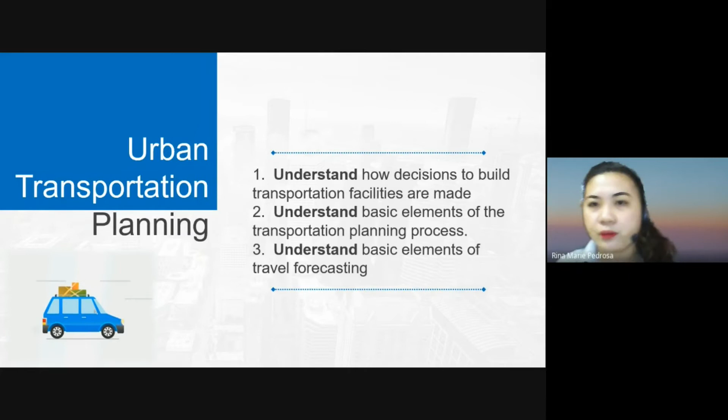So there are common types of urban land uses. To tackle this, I'll just give it a review: residential, commercial, industrial, institutional, recreational, and agricultural. This can be found based on your CLUP, your Comprehensive Land Use Plan. This varies depending on the municipality or city here in the Philippines, but it's also the same in other countries.

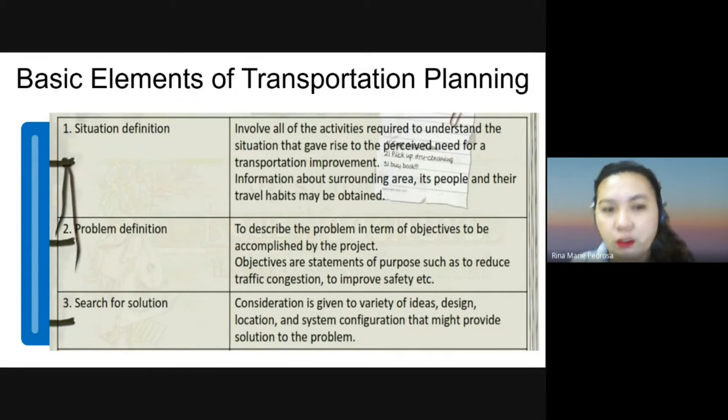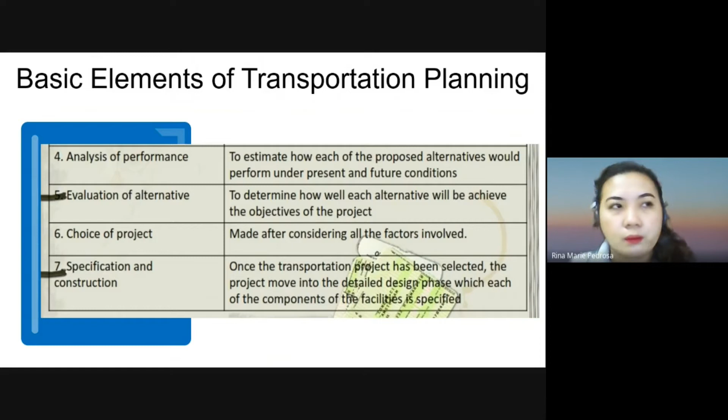So going back to our basic elements of transportation planning, again: situation definition, problem definition, search for solution, analysis of performance, evaluation of alternative, choice of project, specification, and construction. I know we have tackled this before and I've given you a few examples, but I'll give you another one for the sake of urban planning - planning the relocation of a rural road, simple yet good enough to explain the steps.

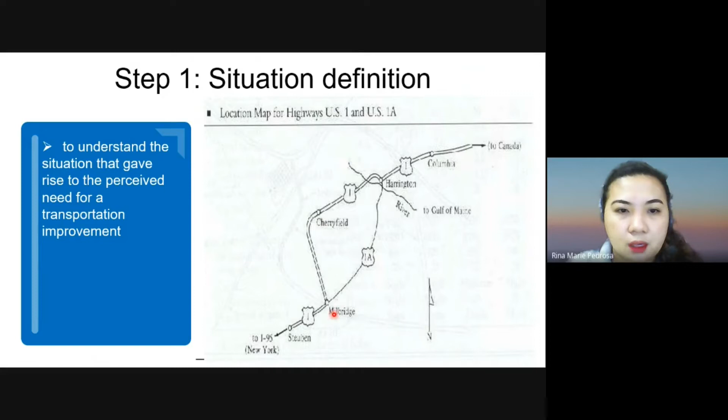Step one, situation definition - to understand the situation that gave rise to the perceived need for the transportation improvement. So this one, they are highlighting this - it's the urban area.

Step two, problem definition. The purpose of this step is to describe the problem in terms of the objectives to be accomplished and translate those objectives into criteria. What are those objectives? Statements of purpose: reduce traffic congestion, improve safety, maximize net highway and user benefits. What is criteria? These are the measures of effectiveness - you consider the travel time, accident rate, the delays.

Fourth step would be the analysis of the performance. So those are our options - now we analyze our options. This is to estimate how each of the proposed alternatives would perform under present and future conditions.

So here is a table they considered - they have the speed, the distance, the travel time, the accident factor, construction cost. Very important: residences displaced, city traffic, present, future returns in 20 years, air quality, noise, tax loss, trees to be removed - that's also one consideration, and of course the runoff.

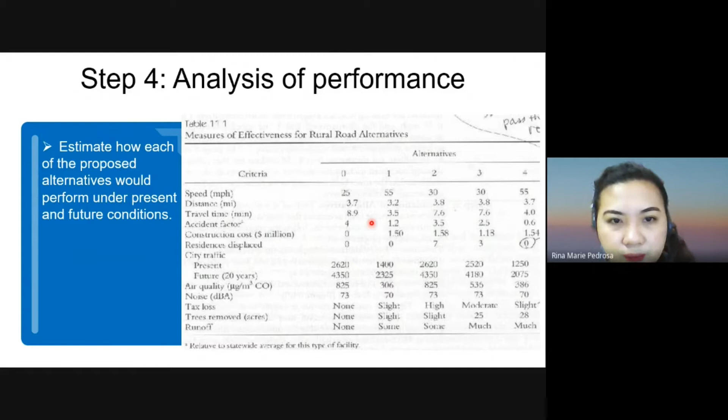Travel time, shorter. The alternatives 2 and 3 are the longest. Accident factor: 1.2, 3.5, 2.5, this one 4 - a higher accident factor. The construction cost, I have 0 for this one. This one's 1.5, 1.58, 1.18, and 1.54. So there are a lot of options here.

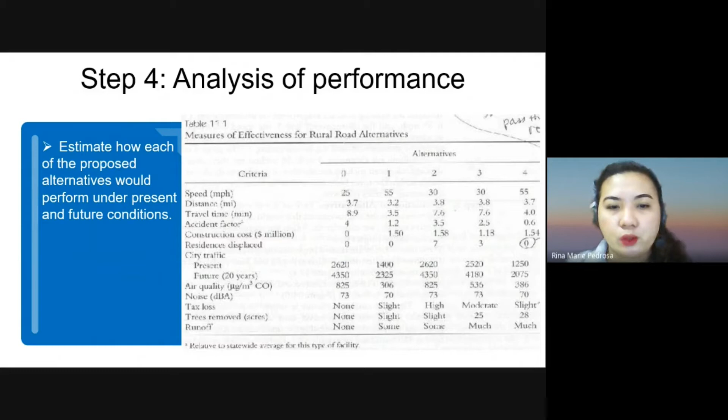We have the evaluation again of our alternatives - the travel time between West Harrington and US 1 versus cost, the cost and the travel time. So options 1, 4, 2, 3. Here, 2, expensive.

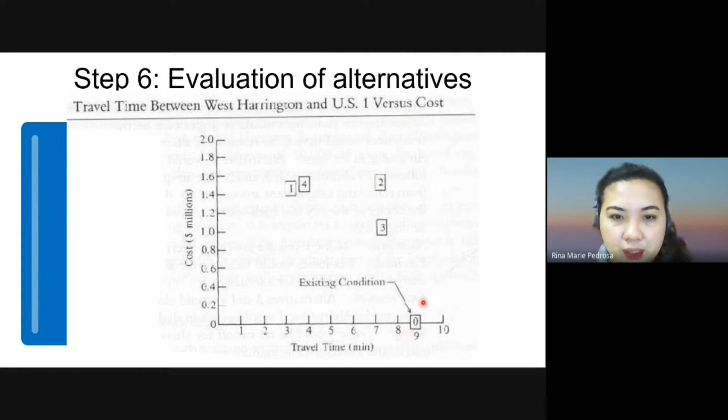Existing condition would be your 0. So you only have 4 options. This one in terms of travel time and the cost. So 2, high risk. 3 is below.

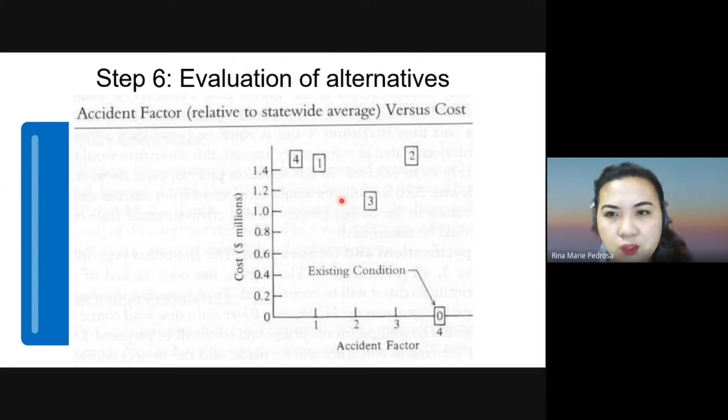So the next step would be the choice of the project. Based on the alternative evaluation in step 6, we will choose the best alternative for design and eventually construction. The best choice may not be built because of oppositions by the people of the community that is affected. So if you observe, most of the checking that we had, alternative number 3 is the best option. But there are 3 residents to be displaced.

The last step would be the specification and construction. Once the project has been chosen, a detailed design phase is begun in which each of the components of the facility is specified. Though there are 3 residents to be displaced and other things needed to be considered, that can actually be of help during the planning, creating the pre-planning stage, before we proceed to the construction.

Same here in the Philippines, we do that. We have a certain section in the planning division that caters to right of way issues, those people who are going to be affected, their lot. And we also have what we call the issuance of ECC under the EMB of the DENR. Before we construct certain infrastructure, we have to secure that certificate to make sure that the environment is not compromised or it will not be affected or deteriorated because of that project. So that's it, that's one consideration.

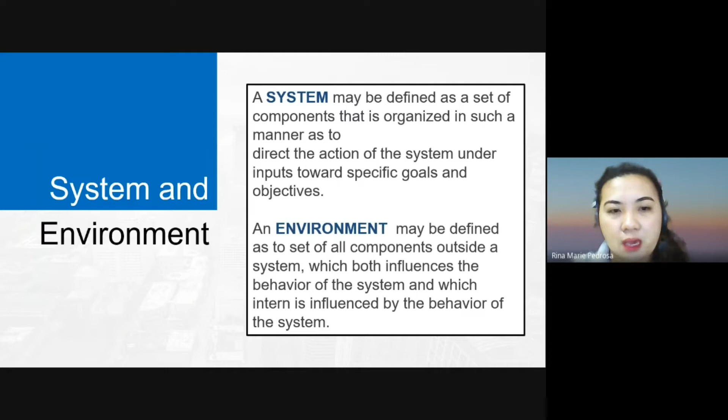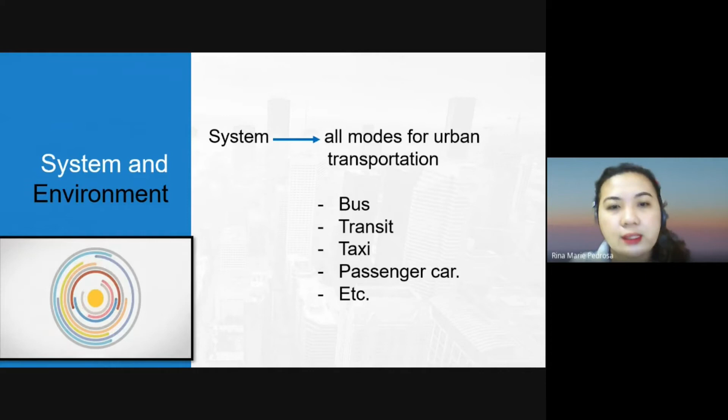So here is your system - all modes of urban transportation. We have the bus, transit, taxi, passenger car, etc. So we can classify them as follows: urban passenger transportation system, urban public transportation system, urban goods transport system, urban intermediate public transport system, urban personal transport system.

So the urban transportation system may be thought of as responding to social and economic forces that exist in urban areas. This urban socio-economic environment is in turn influenced by the characteristics of the transport system. So here are those classifications: passenger transportation system, public transportation system, goods transportation system, intermediate public transport system, and personal transport system.

So who does all these things? A system planner. So what is the role of the system planner? They are the ones who conceive in general ways the direction of their efforts to design a system that achieves maximum integration or degree of fit between the system and its environment.

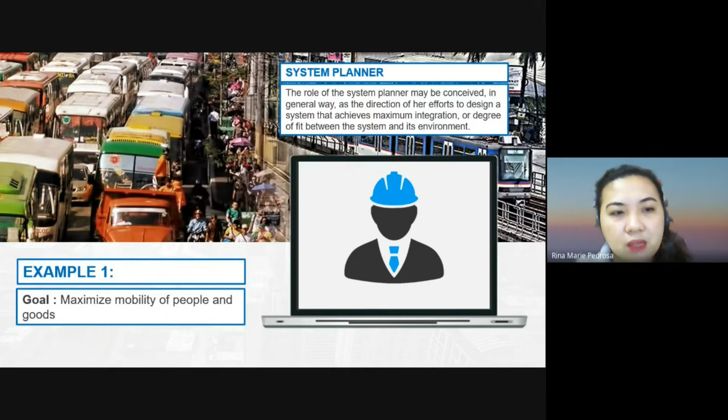Let's have an example for that. Example: maximize mobility of people and goods. So what are the objectives? We have to minimize travel time. The second one, minimize travel cost. Third, provide adequate frequency of service. Fourth, provide adequate system capacity, provide adequate system safety, and lastly, provide adequate system reliability.

So what will be our standards? We already have our objectives, criteria. Now how are we going to maximize mobility of people and goods? First one, to minimize travel time. Then the travel time by public transport between major activity centers should not exceed 30 minutes.

The second goal is to minimize travel cost. The travel time cost by public transport should not exceed 15% of the travel cost of private transport.

Third, provide adequate frequency of service. The frequency of public transport service on any route should be not less than 3 per hour.

Fourth, provide adequate system capacity. The peak hour occupancy of public transport vehicles should not exceed the permissible limits.

Fifth, provide adequate system safety. Fatal accidents involving public transport vehicles should be less than 1% of the total.

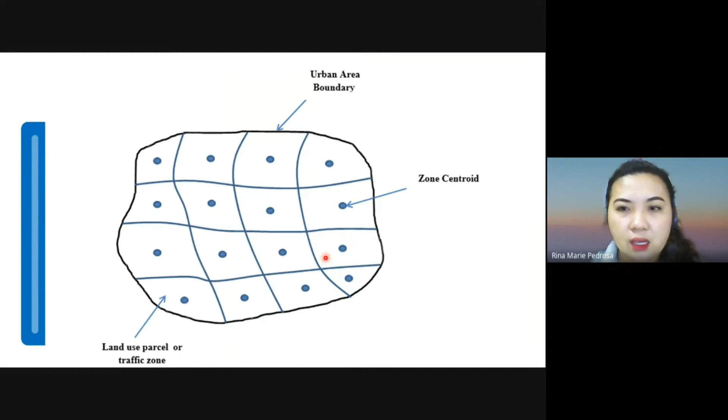Here you can observe this is the zone centroid, the center of the zone. This is your zone, this is the urban area boundary, and this is the land use parcel or traffic zone. That's how you create it.

Let's go to the transportation survey. The first stage in the formulation of a transportation plan is to collect data on all factors likely to influence your travel pattern.

The work involves a number of surveys: number 1, an inventory of existing travel pattern; number 2, an inventory of existing transport facilities; number 3, an inventory of existing land use and economic activities.

If you recall, we had the options 0, 1, 2, 3, and 4. Option 0 was actually the existing condition.

The study area for which transportation facilities are being planned is first of all defined. Transportation planning can be at the national level, the regional level, or at the urban area level. For planning at the urban level, the study area should embrace the whole conurbation containing the existing and potential continuously built-up areas of the city.

The imaginary line representing the boundary of the study area is termed the external cordon line. The area inside the external cordon line determines the travel pattern to a large extent, and as such it is surveyed in great detail. The land use pattern and economic activities are studied intensively, and detailed surveys such as the home interview survey are conducted in this area to determine travel characteristics. On the other hand, the area outside the cordon line is not studied in such detail.

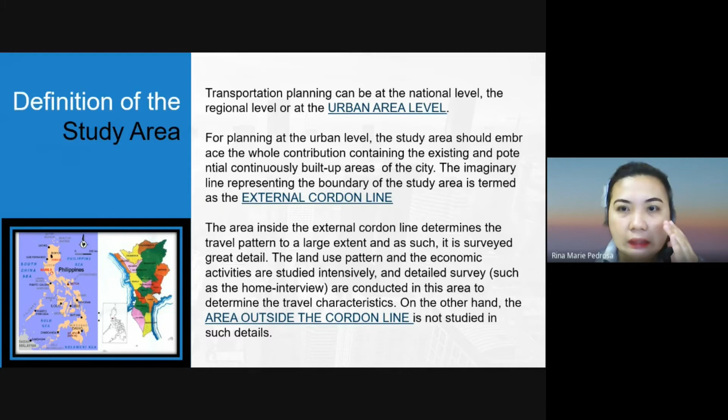So how do you select the cordon line, I mean the external cordon line? The selection of the external cordon line for urban transportation planning should be done carefully, with due consideration of several factors.

Number 1, the external cordon line should circumscribe all areas which are already built up and those areas which are considered likely to be developed during the planning period.

The external cordon line should contain all areas of systematic daily life of the people oriented towards the city center, and should in effect be the commuter shed.

The third factor: the external cordon line should be continuous and uniform in its course so that movements cross it only once.

The line should intersect roads where it is safe and convenient for carrying out traffic surveys.

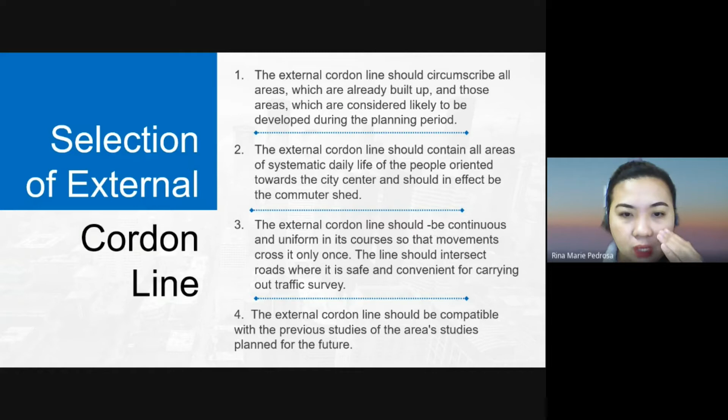Let's go to zoning. The defined study area is subdivided into smaller areas called zones or traffic zones. The purpose of such subdivision is to facilitate the spatial quantification of land use and economic factors which influence travel pattern. Subdivision into zones further helps in geographically associating the origins and destinations of travel.

Zones within the study area are called internal zones, and those outside the study area are called external zones. In large study projects, it is convenient to divide the study area into sectors, which are subdivided into zones.

Zones can themselves be subdivided into subzones, depending upon the type of land use. A convenient system of coding of zones will be useful for the study. One such system divides the study area into 9 sectors.

So the example that I'm going to be presenting: the central sector, or the CBD. What does CBD mean? A central business district - this is the commercial center of an urban area. Usually, CBD is designated as 0, and the remaining 8 sectors are designated from 1 to 8 in a clockwise manner. The prefix 9 is reserved for the external zones. Each sector is subdivided into 10 zones bearing numbers from 0 to 9. So that's how you do it.

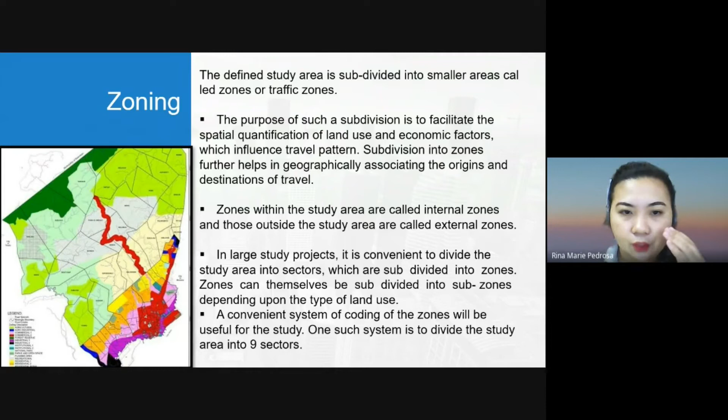So here is an example, actually based in the US: the Charlotte Area Transportation Study, thoroughfare system, and zone boundary. So they have one, two, three - so this is their zones, traffic zones.

It would be helpful if the following points are kept in view when dividing the area into zones. The zones should have a homogeneous land use so as to reflect accurately the associated trip making behavior. You will understand this further when we go to our traffic demand models - if you remember, trip distribution, trip generation, modal split, and route assignment. You'll be discussing that in the next topic.

Number two, anticipated change in land use should be considered when subdividing the study area into zones. Three, it would be advantageous if the subdivision follows closely that adopted by other bodies, for example the census department, for data collection - this will facilitate correlation of the data. So census, we already have that.

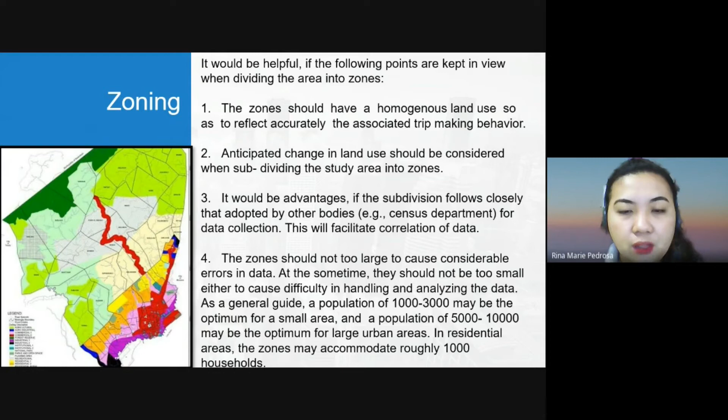Number four, the zones should not be too large to cause considerable errors in data. At the same time, they should not be too small either, to cause difficulty in handling and analyzing the data. As a general guide, a population of 1,000 to 3,000 may be the optimum for a small area, and a population of 5,000 to 10,000 may be the optimum for large urban areas. In residential areas, the zones may accommodate roughly 1,000 households.

Number five, the zones should preferably have a regular geometric form for easily determining the centroid, which represents the origin and destination of travel for your OD study. Number six, the sectors should represent the catchment of trips generated on a primary route. Number seven, zones should be compatible with screen lines and cordon lines.

Zone boundaries should preferably be watersheds of trip making. Number nine, natural or physical barriers such as canals, rivers, or any type of water bodies can form convenient zone boundaries. And lastly, number 10, in addition to the external cordon lines, there may be a number of internal cordon lines arranged as concentric rings to check the accuracy of survey data.

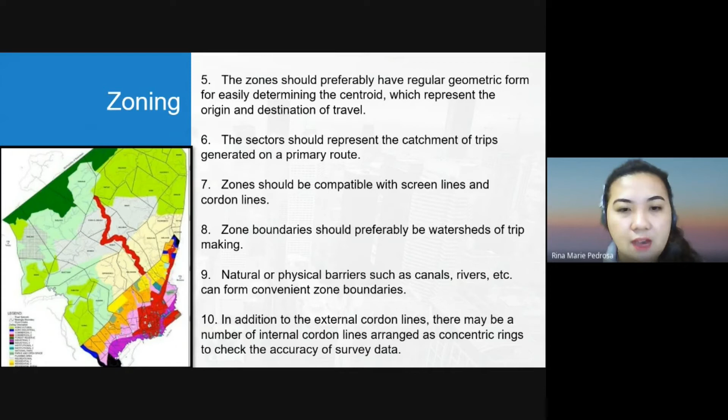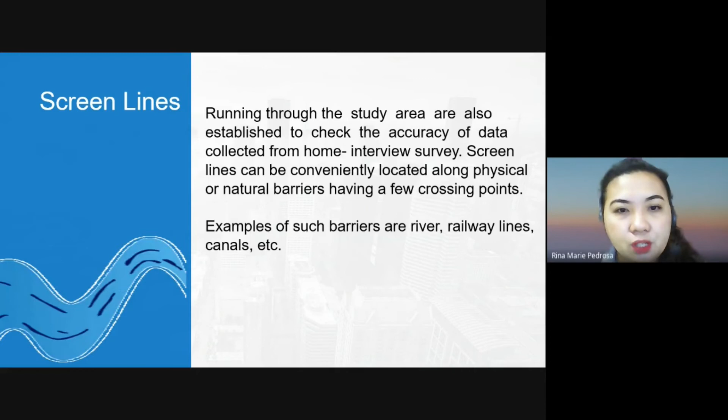So what is a screen line? We already discussed the cordon lines - now let's proceed to the screen lines. Lines running through the study area are also established to check the accuracy of data collected from home interview surveys. Screen lines can be conveniently located along physical or natural barriers having a few crossing points, and examples of such barriers are rivers, railway lines, canals, etc.

So these are the types of movements. For large urban areas, the internal-to-internal travel is heavy, whereas for small areas having a population less than 5,000, the internal-to-internal travel is relatively less. Most details of internal-to-internal travel can be obtained by home interview survey. So what are these external, internal, internal-to-internal movements? These are the basic movements for which survey data are required.

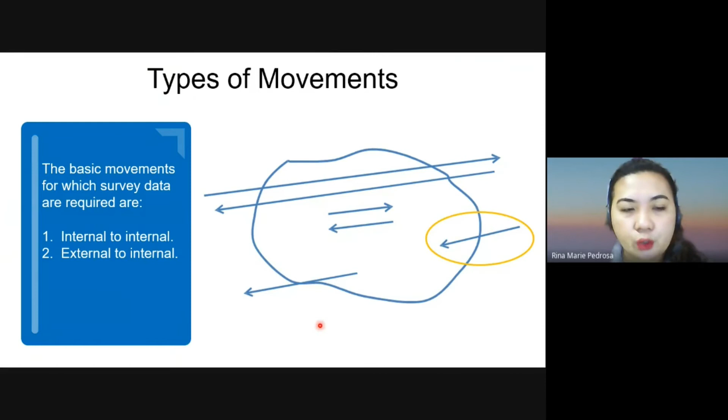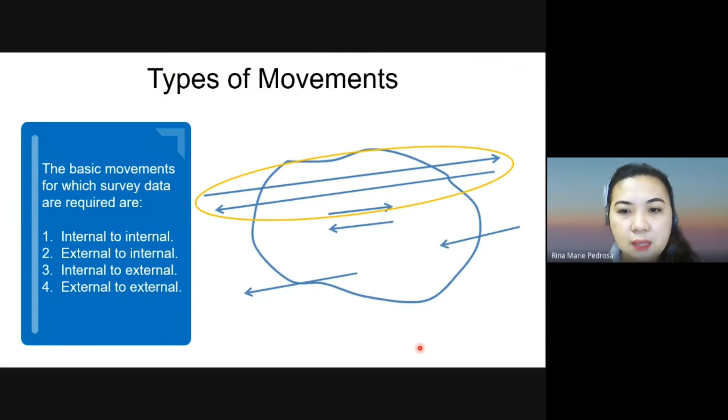Let's have the internal-to-internal: when you see this arrow, this is the origin, this is the destination - so this is internal, within your zone or boundary. The second one is external-to-internal: from external to internal, going inside your zone. The third one is internal-to-external: from inside your zone going outside. And we also have external-to-external, where they're just passing by - these are the long ones. The details of internal-external, external-internal, and external-external travels can be studied by cordon surveys.

So let's go to data collection. When collected at home, the data can be wide-ranging and cover all the trips made during a given period. The data collected during the trip is necessarily of limited scope, since the procedure yields data only on the particular trip intercepted. So that is the data collected at home.

There's also the data collected during the trip end and also data at the destination of the trip. So at the destination end, direct interview types of surveys provide data on demand for parking facilities and the trip ends at major traffic attraction centers such as factories, offices, and commercial establishments.

The following are the surveys that are usually carried out: home interview survey, commercial vehicle survey, intermediate public transport surveys, public transport surveys, roadside interview surveys, postcard questionnaire surveys, registration number surveys, and lastly, tag-on vehicle surveys.

The information to be collected from the home interview survey can be broadly classified into two groups: household information, and number two, the journey or trip data. So this one is mostly about socioeconomic profiling.

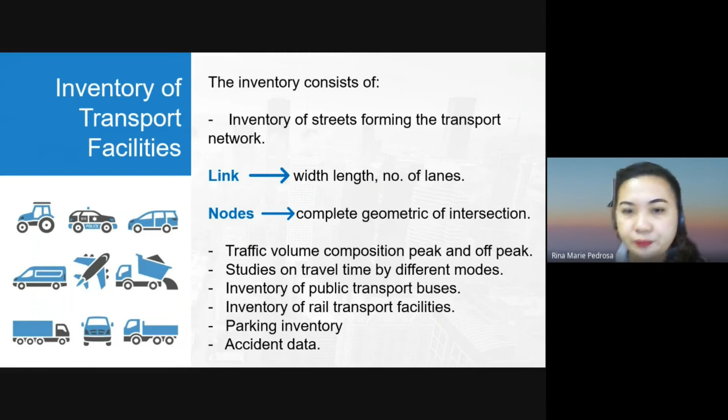Aside from the transport facilities, you should also have the inventory of land use and economic activities. Number one, the inventory of land use. Since travel characteristics are closely related to the land use pattern, it is of utmost importance that an accurate inventory of land use be prepared. So data on intensity of usage of land for different purposes, such as residential, industrial, commercial, recreational, open space, etc., in each of the traffic zones, are to be located from concerned departments or organizations.

Meanwhile, number two, the inventory of economic activities. Aggregate data on demographic and socioeconomic activities should be collected from other sources, to include the following: first, the population of the planning area in various zones, age, sex, and composition of the family, employment statistics, housing statistics, income, vehicle ownership.

Next topic would be our transport related land use model, so the land use transport interaction.

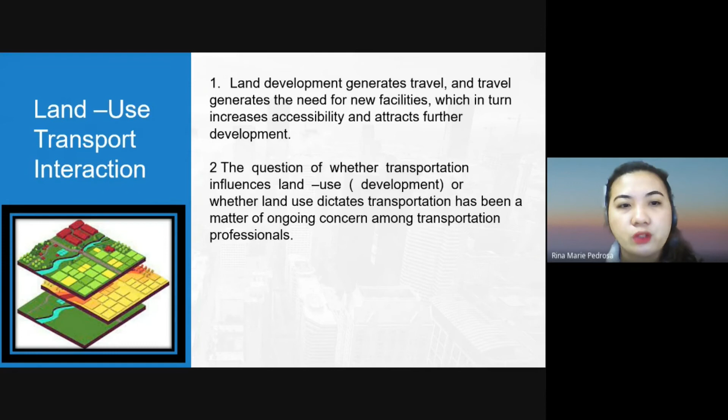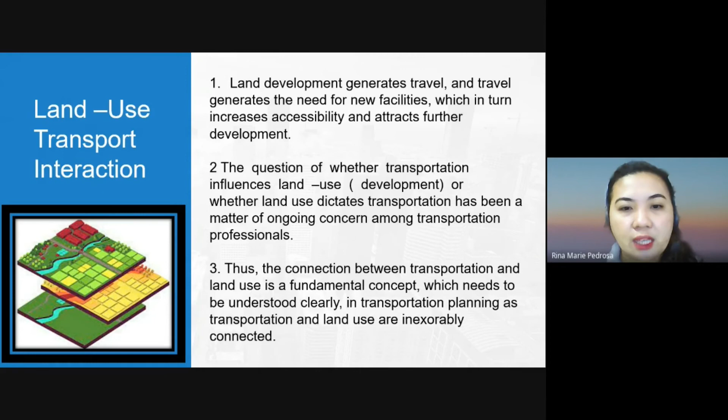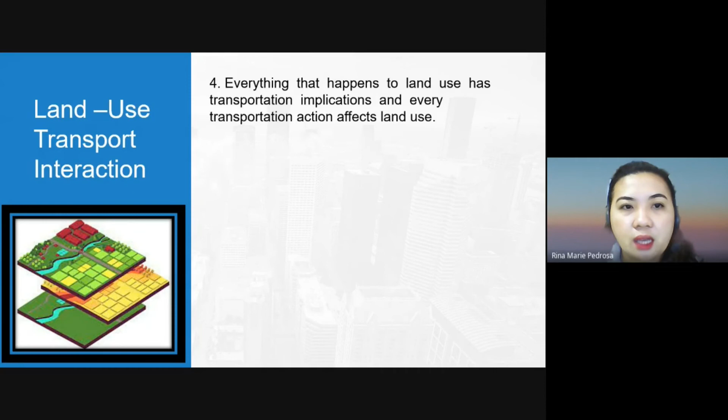First, land development generates travel, and travel generates the need for new facilities, which in turn increase accessibility and attracts further development. Second, whether transportation influences land use or land use dictates transportation has been a matter of ongoing concern among transportation professionals. Third, the connection between transportation and land use is a fundamental concept which needs to be understood clearly in transportation planning, as transportation and land use are inexorably connected. Fourth, everything that happens to land use has transportation implications, and every transportation action affects land use.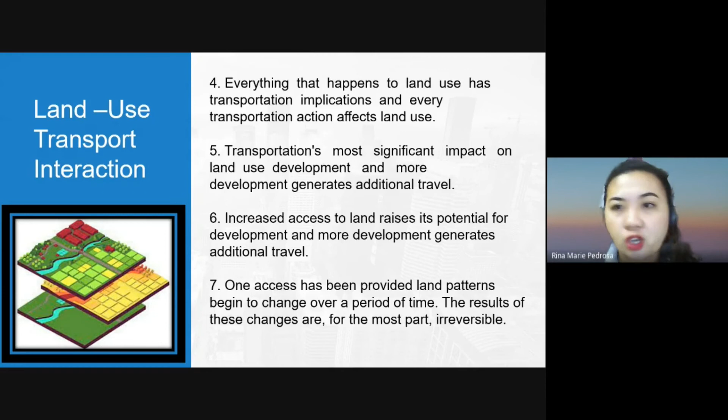So the land use transport feedback cycle: in a transport system, you should know the activities. From the activities, you know the land use. From the land use, then you can have the accessibility, the roads or other infrastructures, then you can create your transport system. It's a cycle. As number seven said, once there are changes, it's irreversible.

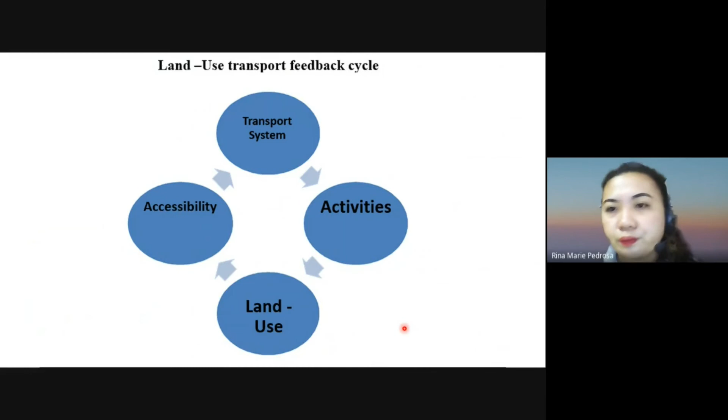A variety of land use transport models have been developed in the past 15 years. A few of them are research models having excellent capabilities for sensitive forecasting, while some are operational models. The former group requires extensive data collected through special surveys, whereas the latter need data which are collected routinely by planning departments. The Lowry derivative models fall into the latter group and are very popular.

So who are these planning departments? We have our DPWH. They are the ones who do the survey, using the automated traffic count, like the machine that they have. They have that one where they pass along the road, those two black ropes. That's what they use to collect traffic counts.

So, the selection of a land use transport model. While selecting the model, a number of considerations become important. Number one, simplicity. The model should have a simple causal structure, which should be easy to comprehend. A simple model will generally consume less time and resources.

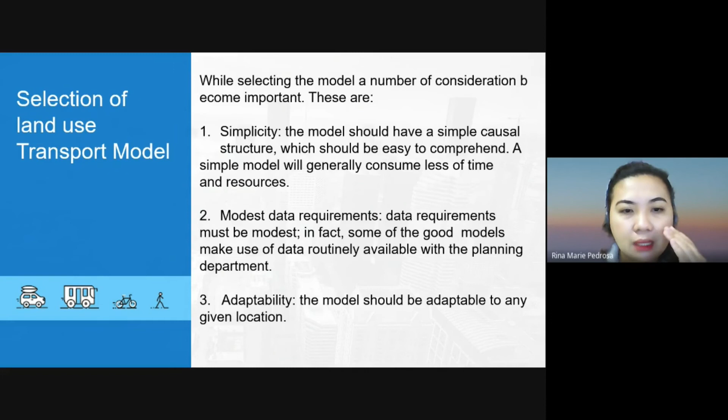Number two, modest data requirements. Requirements must be modest; in fact, some of the good models make use of data routinely available with the planning department. Number three, adaptability: the model should be adaptable to any given location. Number four, comprehensiveness: the model should be comprehensive and should synthesize the relationship between activities, housing, and transportation adequately well.

Number five, operationality and rapidity. The model should be operational, capable of easy interpretation, and should be able to rapidly test a wide range of policy options. And lastly, computer cost: the model should be operational at a relatively cheap computer cost.

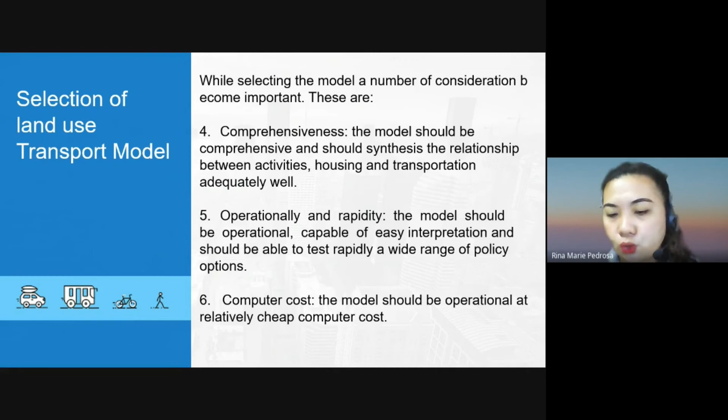So there is what we call the Lowry derivative model. The Lowry derivative models have many of the above attributes, as was said a while ago, being the latter option. They are simple to use, require modest data, are comprehensive and economical, have good response to change in input variables, and have a simple causal structure. They have therefore been used extensively and successfully in a number of studies.

Going to our Lowry derivative model, the Lowry model relates the three principal components of the urban area: first, population; second, employment; and third, communication between population and employment. So the model equation system.

The Lowry model can be represented in terms of nine simultaneous equations and three inequalities. The following notation will be used: A is denoted as the area of land, E for employment or the number of persons, N for population or the number of households, T as the index of trip distribution, and Z for your constraints.

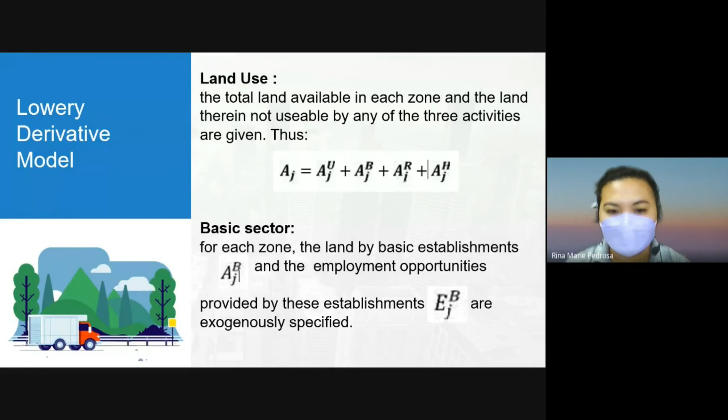Continuing, let's proceed to the retail sector, where the retail sectors are divided into groups, each having its own characteristic production function. The employment in each retail sector can be considered roughly to be a function of the households in the region.

So the equation we have is E of k equals a raised to k times n.

The distribution of this retail employment among the zones depends upon the market at each location. If the shopping trips originate either from home or from workplaces, the market potential of any given location can be defined as a weighted index of the number of households in the surrounding areas and the number of persons employed nearby.

Thus, E raised to kj equals B raised to k multiplied by the summation of C raised to k ni over T raised to k ij plus D raised to k ej, from the limits of n where i equals 1.

C raised to k and D raised to k are measures of the relative importance of homes and workplace as origins for a particular type of shopping. B raised to k is a scale factor which adjusts retail employment.

So the equation for that is E raised to k is equivalent to the summation of E raised to kj, raised to n, over j equals 1.

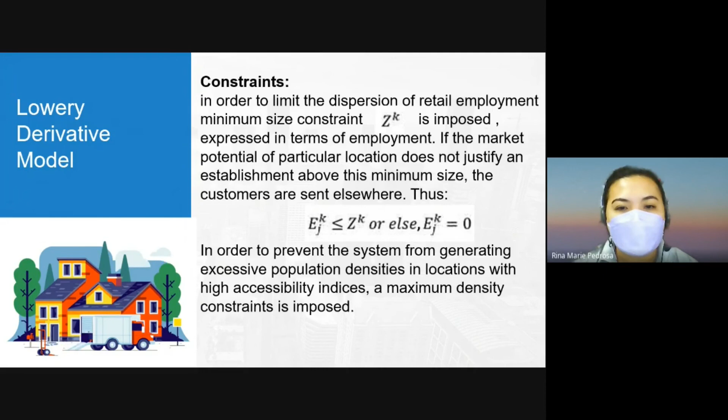So, in order to prevent the system from generating excessive population densities in locations with high accessibility indices, a maximum density constraint is imposed. The value of this constraint, or the number of households per unit area of residential space, may vary from zone to zone under zoning ordinances. So you also consider this one.

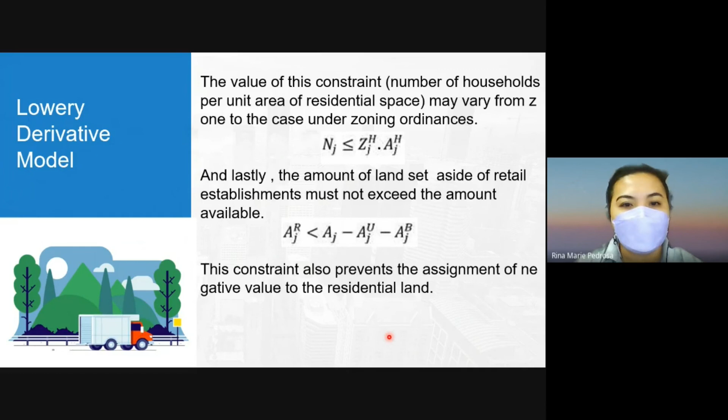Lastly, the amount of land set aside for retail establishments must not exceed the amount available. So you have this equation to be considered for your constraints. This constraint also prevents the assignment of negative values to the residential area.

So that was our Lowry equation.

Meanwhile, we also have another equation, which is about the Hansen accessibility model. This one is designed to predict the location of population based on the premise that employment is the predominant factor in determining location. So he suggested the use of an accessibility index, which is denoted by A of ij.

A's of i's of j is equal to the accessibility index of zone i with respect to zone j. E's of j is the total employment. D's of ij is the distance between i and j, and b is an exponent.

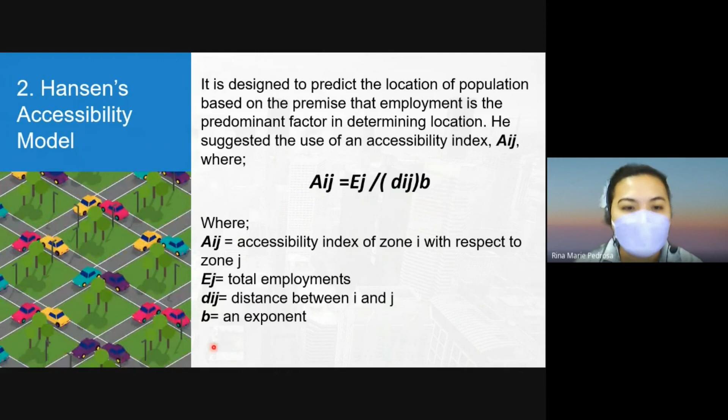So the overall accessibility index for zone i is therefore this one.

The amount of vacant land that is suitable and available for residential use is an additional factor in attracting future population to the zone in question. This is referred to as holding capacity, H of I. The development potential of a zone, D sub I, is therefore D sub I equals A sub I times H of I. The population is distributed to zones based on relative development potential, which is A sub I, H of I, over the summation of A sub I, H of I.

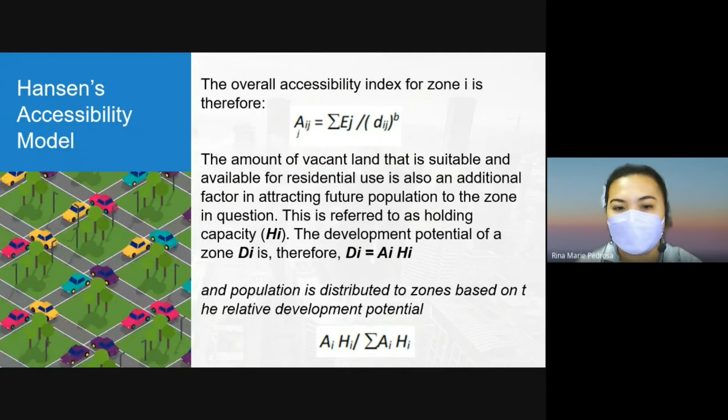So if the total growth factor in population in a future year is G sub t, the population allocated to zone I will be G sub I equals G sub t times the quantity A sub I, H of I over the summation of A sub I, H of I, equivalent to G sub t times the quantity D sub I divided by the summation of D sub I.

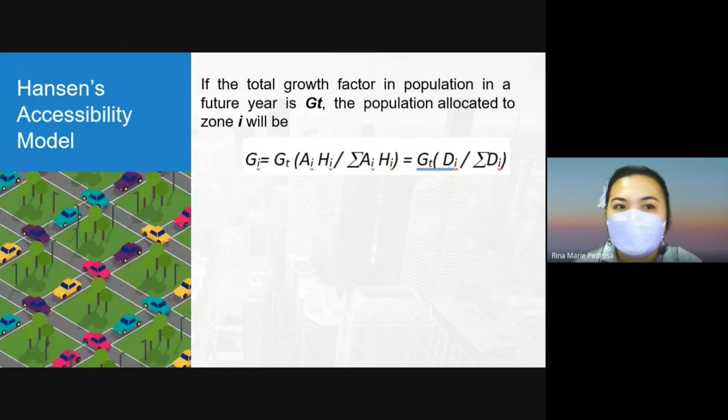Next would be the density saturation gradient method. This method was first used in the Chicago Area Transportation Study, or CATS. Since then, many researchers have elaborated on this basic work.

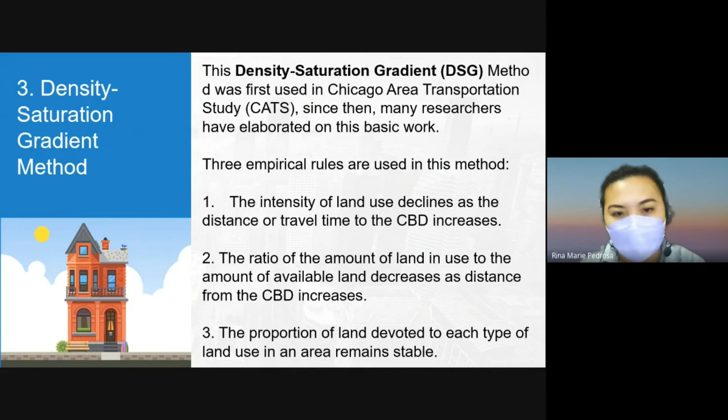There are three empirical rules used in this method. Number one, the intensity of land use declines as the distance or travel time to the CBD increases. Number two, the ratio of the amount of land in use to the amount of available land decreases as distance from the CBD increases.

The proportion of land devoted to each type of land use in an area remains stable. Clark made another assumption not dealt with by the density equation: that higher downtown densities and lower suburban densities will tend to equalize over time in most urban areas. This is supported by findings of the most recent census, which indicates strong trends of population decline in the CBD.

And increased population movement toward peripheral and suburban areas. This observation implies that the density saturation gradient is a function of age or original location of the city and can be determined experimentally. So here is the equation. Clark derived the basic equation for expressing this density-distance relationship.

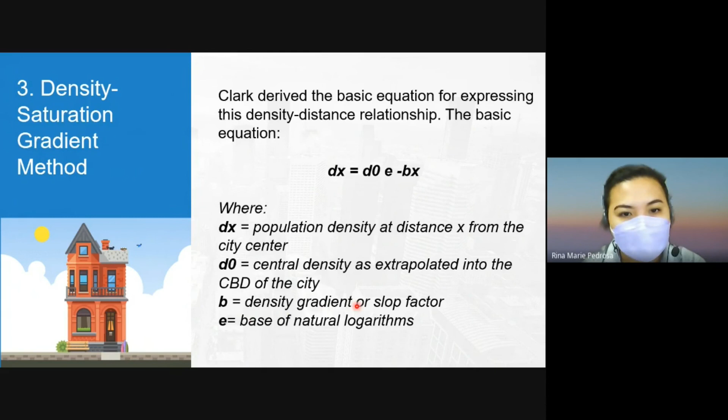So d of x is the population density at distance x from the city center. d of 0 is equal to the central density as extrapolated into the CBD of the city, denoted as 0. And b is equal to the density gradient or slope factor, and e is the base of natural logarithms.

Holding capacity is given by the following expression: H of C sub I is the holding capacity of zone I, P sub I is the existing residential population of the zone, while V sub I is the vacant, available, and suitable land in zone I, and D is the anticipated average density at which all future residential development will occur.

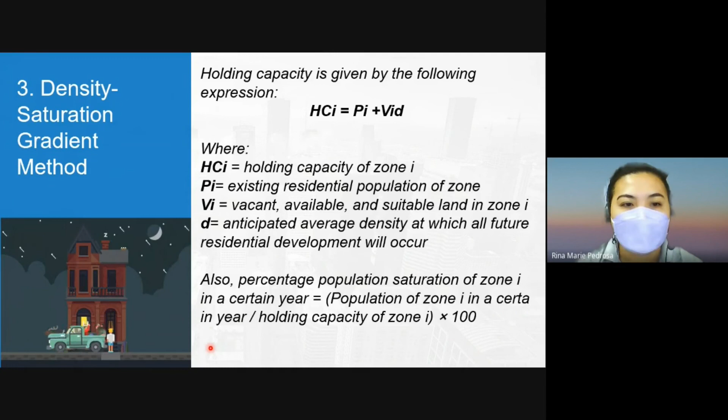Also, the percentage population saturation of zone I in a certain year is equivalent to the population of zone I in that year per holding capacity of zone I, times 100.

The general procedure can be described as follows. Step one, establish the relationship between residential density and the distance from the CBD. Step two, determine the percent population saturation for each zone and aggregate this percentage by ring and sector. Step three, determine the percentage area of useful available land in each zone earmarked for residential use. This percentage, known as the percentage residential saturation, is plotted against distance from the CBD.

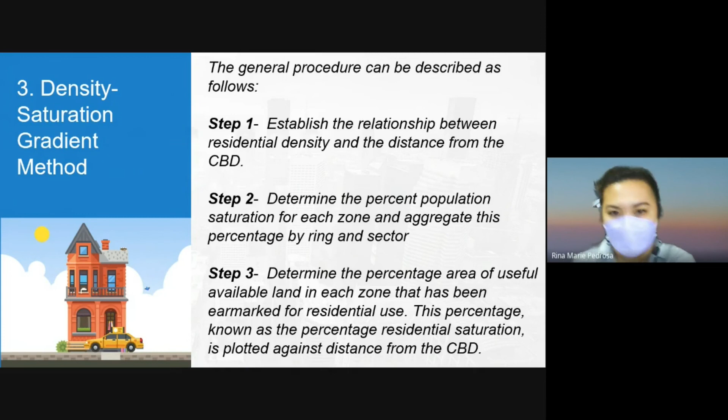There are 7 steps total. Step 4, obtain the total population for the forecast year for the city; this figure is determined exogenously. Step 5, plot a curve representing the residential density, similar to the one plotted under step 1, such that the area under the curve is proportional to the total population obtained in step 4.

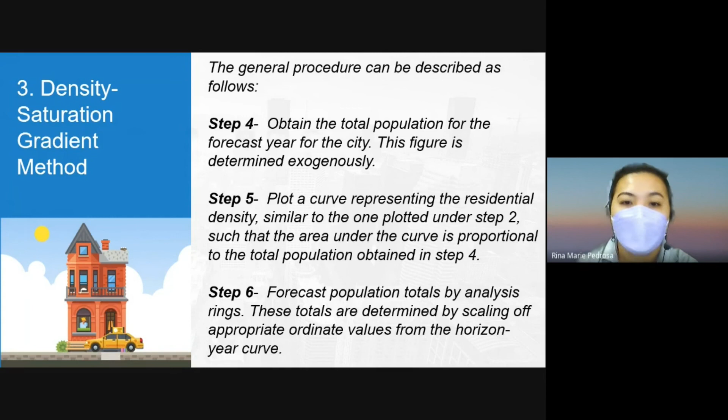Step 6, forecast population totals by analysis rings; these totals are determined by scaling off appropriate ordinate values from the horizon year curve. The last step is to distribute ring totals to individual zones by subjectively weighting each zone's attractiveness according to factors such as distance to shopping centers, distance to major street systems or bus lines, residential capacity, nearness to school, and so on.

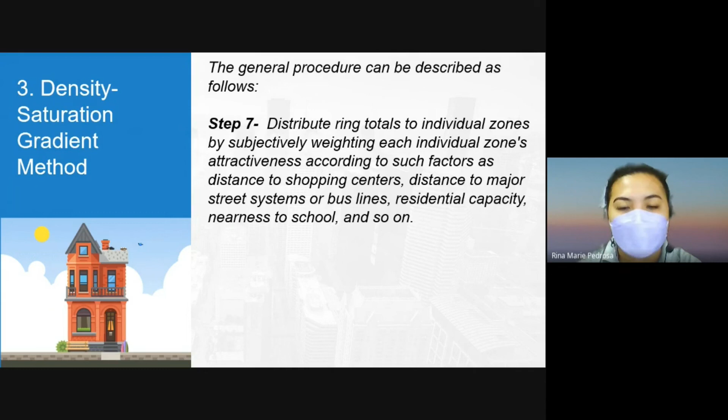So that is about how we do urban planning. But we will be doing problem solving in the next topic, which is about our trip travel demand models - that is, trip generation, trip distribution, modal split, and route assignment. So that concludes our topic number 3.